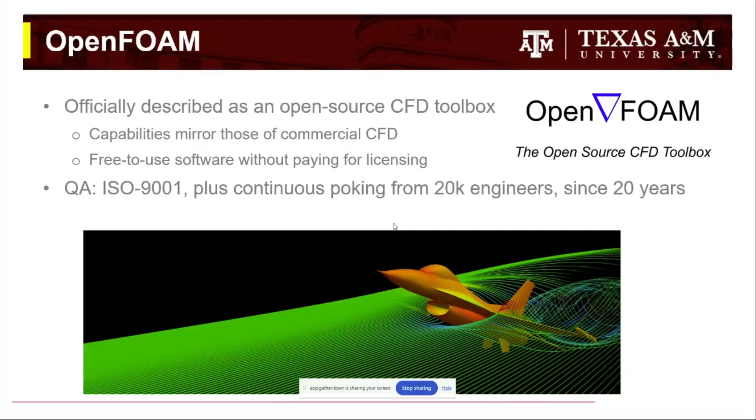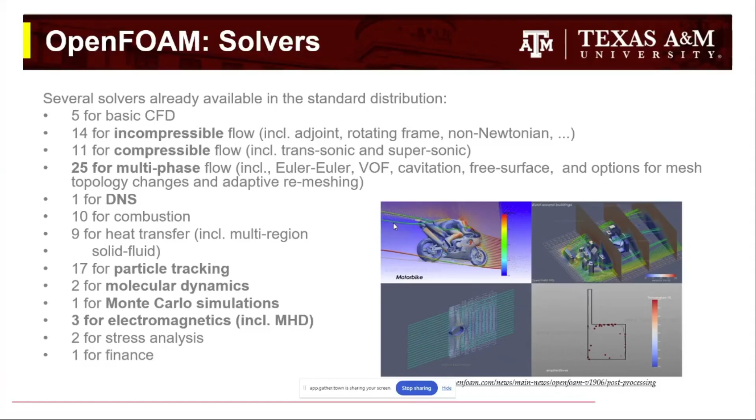You look at the source code; it's very well written. There's a lot of issues that have been solved, thousands, and that to me is a sign of quality of a code. There's a lot of solvers if you want to do anything that is fluid dynamics. There's in there everything you want. Relevant for fusion, incompressible, compressible, multi-phase, particle tracking, can do molecular dynamics, Monte Carlo simulations, electromagnetics, and stress analysis, or finance if you want. All these solvers are available in OpenFOAM.

Plus, since the community is vast, there's a lot you can find out there, packages that have been created on top of OpenFOAM that can be useful. I think a good example is solids4foam. It has been developed for many years at the University College Dublin. It has full capabilities for nonlinear mechanics.

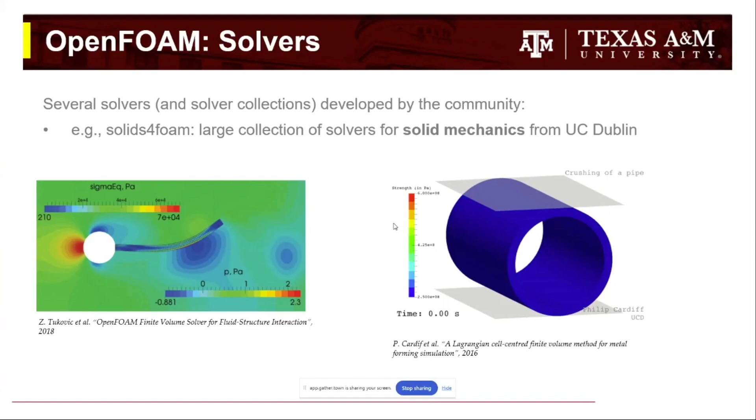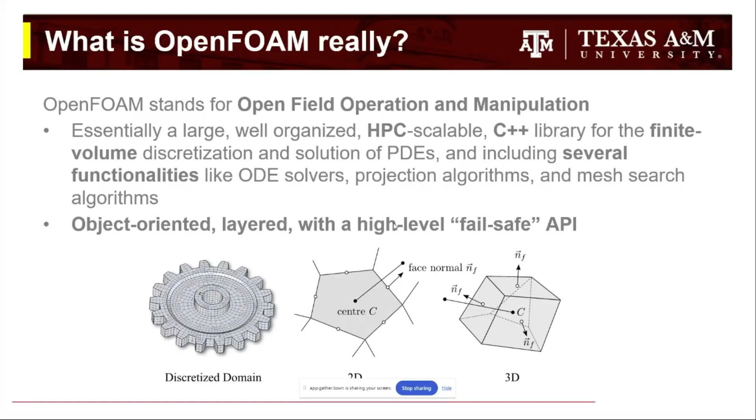Now, OpenFOAM stands for Open Field Operation and Manipulation. This tells you that it's not just a collection of solvers, it's a large, well-organized HPC scalable C++ library. Aimed mainly at finite volume discretization, but it has a lot of functionalities. It has an object-oriented layered API. OpenFOAM is mainly a finite volume tool. It also has finite area method, arbitrary mesh interfaces, mesh-to-mesh projection, dynamic meshes, ODE solvers, Monte Carlo solvers, Lagrangian. It's a big library. It's probably more than a million lines of code.

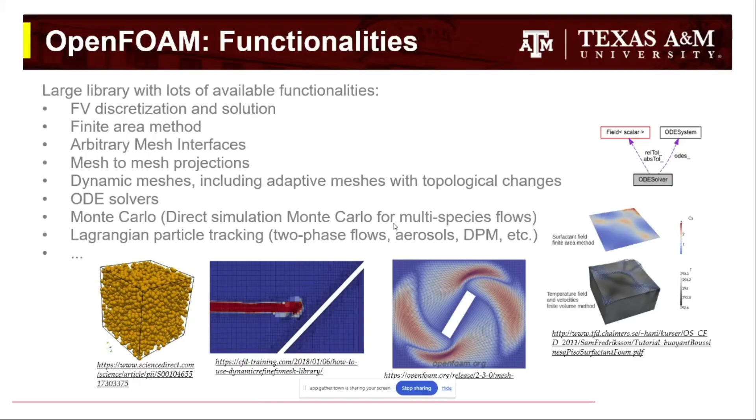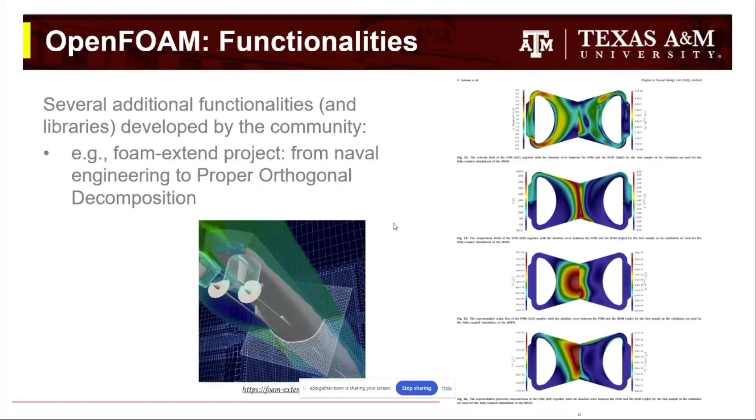So each time in the past I had to find the functionality that I needed, I found it in the code. And once again, community is vast, which means you will find additional functionalities created by the community. It goes from naval engineering to proper orthogonal decomposition. So you find a lot if you need to do very specialized research.

What about nuclear? What did we do in nuclear? I'm talking about nuclear because this has been most of my background in the past, but I think it's relevant for fusion in several ways. I'll be quick because this is not the main scope of today's talk. But essentially, OpenFOAM has been used in nuclear almost since the beginnings of OpenFOAM. I think OpenFOAM was released in the late 90s, early 2000s, and from the early 2000s it has been used during the PBMR project in South Africa.

It gained traction between 2010 and 2015, especially because there was interest in advanced reactors and we needed tools that were more flexible than legacy nuclear fission tools. Starting 2015, you start seeing some coordinated persistent developments. There are three I'm familiar with: one is GeN-Foam, one is OFFBEAT, one is containmentFOAM. The first one is for multiphysics. The second one is for fuel behavior, or in general, non-linear mechanics with effects of irradiation, which could be relevant in fusion for things like behavior of materials in blankets, and the third for containment studies.

Now, without going into the details of all these tools, what is relevant is that from the nuclear community, there have been contributions that are useful for fusion. First of all, 1- and 2-phase flow in porous media with advanced capabilities, which can be useful if you want to simulate things like pebble bed blankets, or in general complex blankets, where it's hard to use standard CFD. We may want to homogenize the structure into something simpler and use correlations. That is available now.

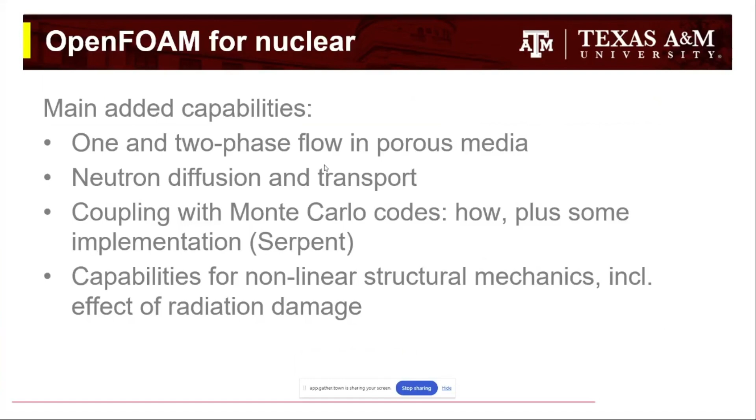Still about capabilities, there's quite a bit of coupling capabilities in OpenFOAM. First of all, what I mentioned, Monte Carlo, there's an available interface in Serpent. In general, the coupling is pretty easy. Somehow, finite volumes and Monte Carlo have a similar philosophy. Finite volumes do balances in cells, and Monte Carlo scores tallies in cells, so the coupling is pretty straightforward.

It's even more straightforward with delta tracking-based tools like Serpent. I believe that's the reason it was the first one trying to do this coupling with OpenFOAM. It's straightforward because pretty much what you do with delta tracking, each time your neutron lands in a place, the question is, where am I? And OpenFOAM finite volume can give a fairly rapid and straightforward answer using an octree search algorithm for the mesh.

There's coupling with ODE-based tools. It's available through the FMI. For those of you who don't know FMI, FMI stands for Functional Mockup Interface. It's a coupling standard that has been proposed more than 10 years ago, I think mainly in the automotive and aeronautic industry. The idea is relatively simple. Instead of creating dedicated code-to-code coupling for every couple of codes, we create a standard. If you abide by the standard, you will be able to couple yourself with any other tool that abides with the same standard.

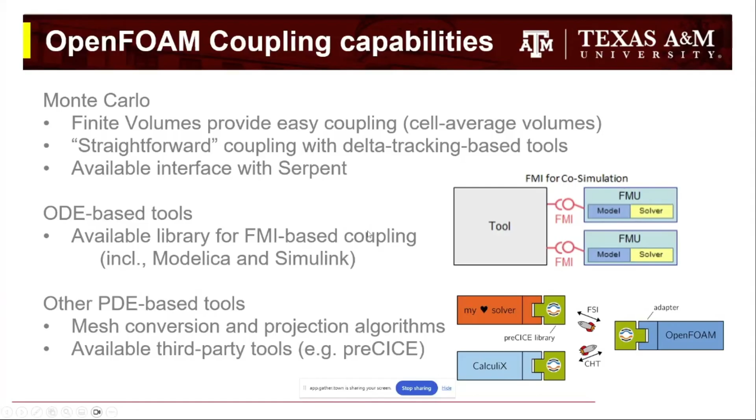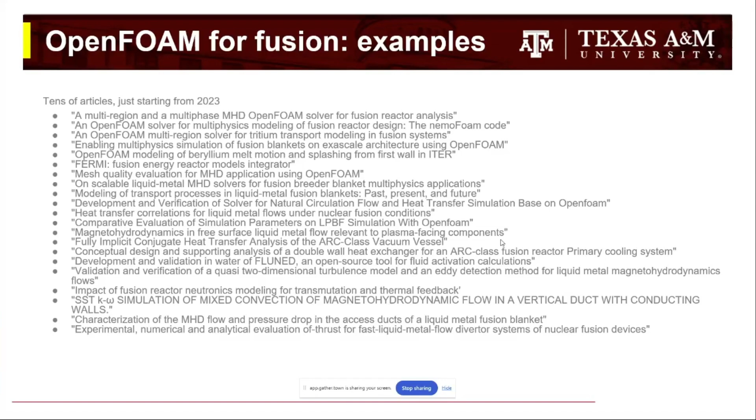Now, more specifically about fusion. So what I did is I Googled, actually on Scholar, OpenFOAM fusion, and it turns out that there are tens of articles. What I did is I extracted a few that I believe can give an idea of what people are doing with OpenFOAM, plus at the end a couple of slides of work I've been doing.

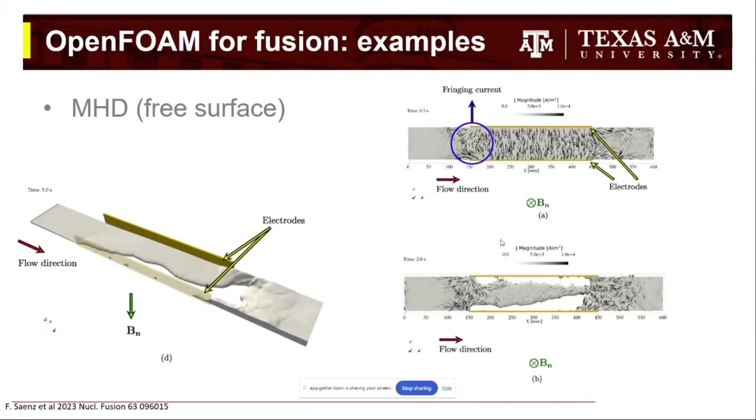MHD, of course, you can do that. Interesting, you can do MHD with free surface, which is not an obvious capability. There's a lot of MHD capabilities for internal flow, but free surface flow means you can do two-phase flow and MHD. There was actually MHD in multi-phase. I actually did it for a bubble rising. Once again, pretty unique capability.

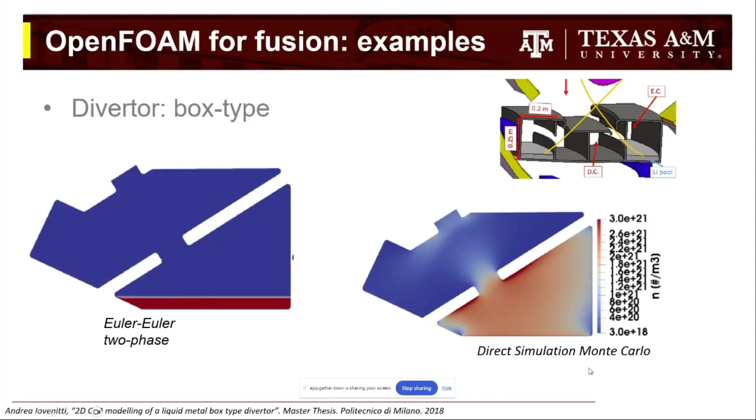There have been students that have tried to develop a divertor, box type, with two different methods, from Euler-Euler two-phase, very standard two-phase flow, to very complex and potentially higher fidelity direct simulation Monte Carlo. I compared the results, and well, it was a master thesis, but it was complete enough, an interesting piece of work. I found work on beryllium melt motion and splashing from first wall in ITER.

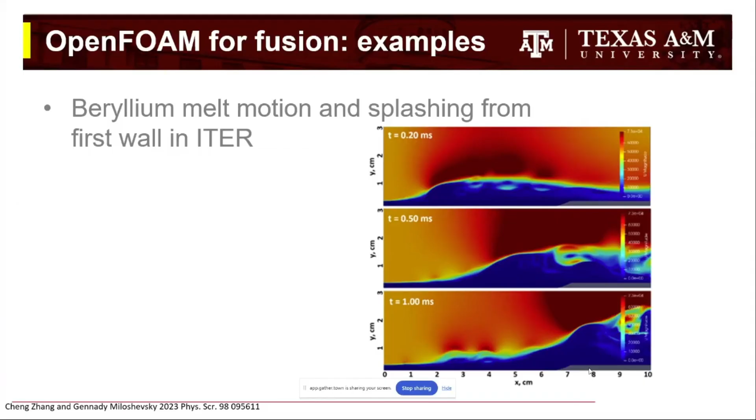And of course, there's an example that has to be mentioned. There's a fairly large project at ORNL. It's called Fermi. And Fermi actually uses the preCICE coupling interface that I mentioned before, together with OpenFOAM and a few other tools. It's a relatively large effort, and a big part of it is on OpenFOAM. If you Google the work from Oak Ridge, you will find several simulations related mainly to the ARC concept.

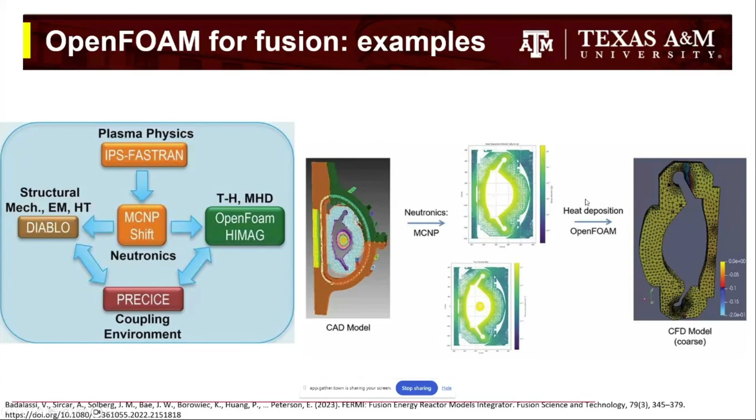And to do that, you use OpenFOAM, you use standard CFD, you add on top a scalar transport. You create a source term using, for instance, MCNP. You transport with OpenFOAM, you do the CFD, and from the cooling of the vacuum chamber, you connect it with a system level tool, and you try to figure out where nitrogen-16 is everywhere in the system.

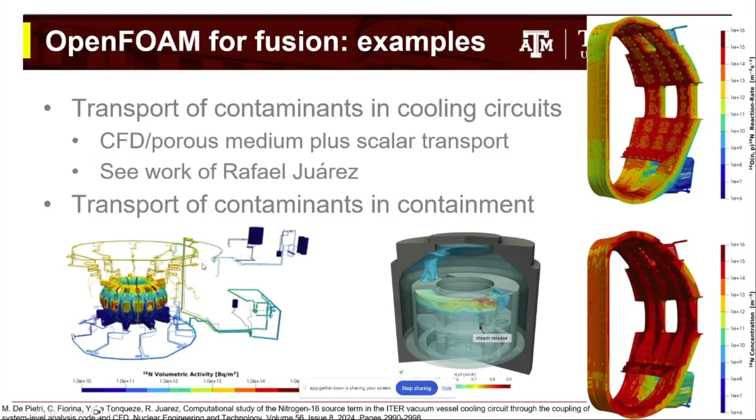And the last piece of work is actually related to inertial fusion energy, something that we discuss much less, but this is gaining traction. The chamber of inertial fusion energy is a big engineering challenge.

Well, it's not like achieving fusion is easy, but sometimes there's a tendency to think that that's the only problem. Actually, there's another problem: how do you design the chamber to extract energy? And the process is pretty complex because once fusion happens, you have to protect your walls. One way to do it is to use liquid walls.

If you do that, the X-rays from fusion will ablate part of your liquid. Ablation will create a shock. The shock will propagate through the chamber towards the interior and then outside, and it will create loads on the wall, splashing of the jets. You will have to clear the chamber. So you need a tool that is able to do jet breakup, shock dynamics, radiative transfer if needed, and OpenFOAM has all these capabilities.

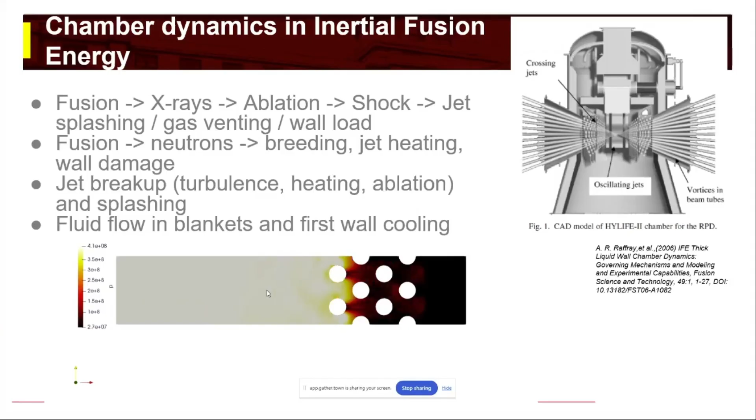And I think I'm getting very close to the end of my presentation. Do I still have a few minutes? Or is it better if I leave time for questions? You're at like 14 and a half minutes, so roughly tie up if you can. I can. I'm actually done. If I had more time, I would give some future direction, but I was essentially done. Feel free.

Oh yeah, something I wanted to mention about future direction. I mentioned briefly this tool, GeN-Foam. I mentioned OFFBEAT. Put together, these tools let you do pretty much everything from shock dynamics to fluid dynamics to structural mechanics. And currently these tools have been integrated into a single tool so that you don't have to do coupling yourself. For instance, if you want to simulate a blanket, you can do both the fluids and the structural mechanics in the same environment.

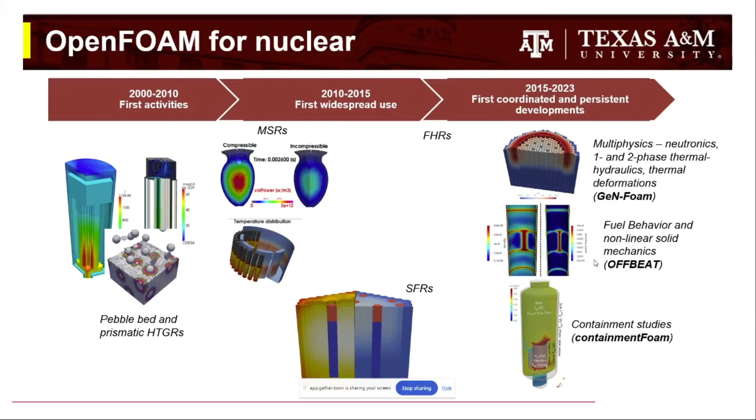It's work that still needs to be published, but it's already available because both of these tools are on GitLab for free, open access. And if you look at GeN-Foam, you will find that it already includes the capabilities of OFFBEAT. And we are working on introducing some fusion-relevant tutorials because for now it's mostly fission. And that's it.

All right, brilliant. Thank you very much, Carlo. OpenFOAM is something that we've been trying to figure out ourselves, to see how we can couple it with our own code. Some fantastic examples there. It's clearly a very powerful code and amazing that it's open source. So I have a question for you already.

Sure. I have a nuanced relationship with OpenFOAM. It's always been very attractive from a feature standpoint, but somewhat repulsive from a user-friendliness point of view. Are there any plans to make OpenFOAM more user-friendly, a Python API, a GUI, or something else? Not on my end. The community has been trying to develop GUIs for a long time. There are some out there, some you have to pay for, some free. What happens is that most OpenFOAM users in the end don't use them.

With OpenFOAM, you have a very steep first entry barrier. But once you get used to it, it's addictive somehow, or easier to use compared to a graphical user interface. To me the more challenging part is the first entry barrier and the fact that there is no native meshing tool. That is more of a pain, but OpenFOAM allows you to use pretty much any tool out there, from Salome to Cubit to ANSYS, and convert meshes to OpenFOAM.